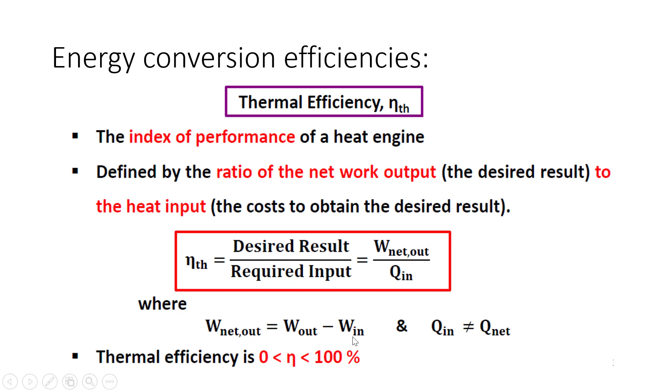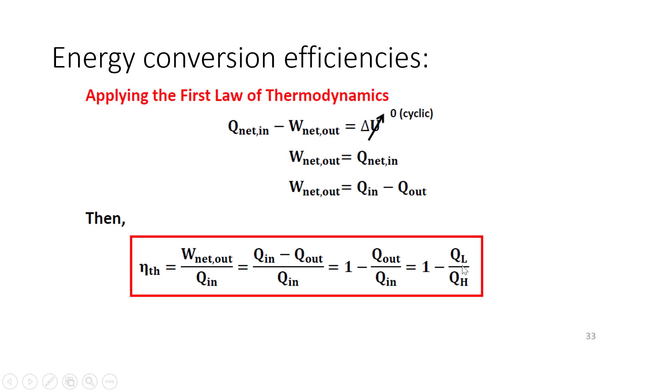Now we're looking at reversible process. The reversible processes are processes which never occur, while the irreversible process is a natural process commonly found in nature. Why do they say reversible processes never occur? Because a reversible process is one in which the system and surrounding can be restored to the initial state from the final state without producing any change in the thermodynamic properties of the universe.

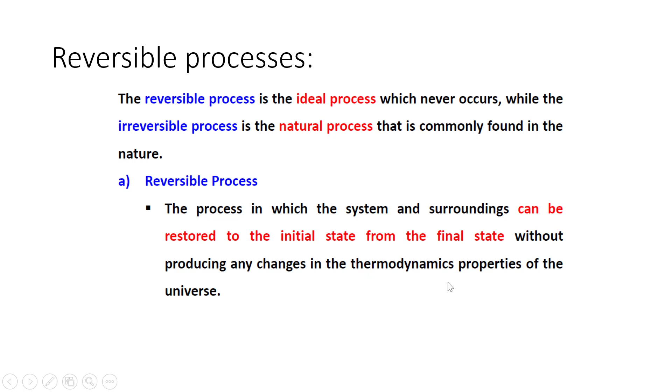If we want to return something logically from the final state to the initial state without changing some thermodynamic properties, there should actually be a change. So reversible process is actually an ideal process.

There are two important conditions for the reversible process to occur. One, the process should occur in infinitesimally small time, meaning it happens in a very short time. Two, all the initial and final states of the system should be in equilibrium with each other, meaning the initial state must equal the final state.

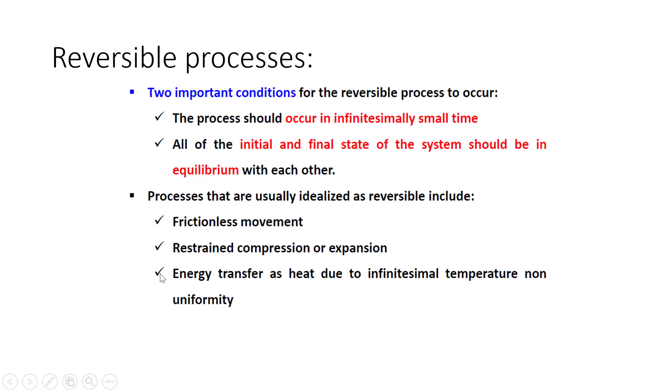Processes that are usually idealized as reversible process include - we must remember we idealize these, they don't really occur that way - frictionless motion, restrained compression or expansion, and energy transfer as heat due to infinitesimal temperature difference, not infinity. There are other examples you can look at too.

Now we will look at irreversible process. The irreversible process states that the initial state of the system and surrounding cannot be restored from the final state. This is logically how it is - the initial state of the system truly cannot be restored, the surrounding cannot be restored from the final state.

During the irreversible process, the various states of the system on the path of change from initial state to final state are not in equilibrium with each other. In simplified terms, the initial state is not the same as, not equal to, the final state.

During the irreversible process, the entropy of the system increases decisively and cannot be reduced back to the initial value. So when an irreversible process occurs, it means entropy is always increasing. Entropy is S. Enthalpy is H. You can look back at that.

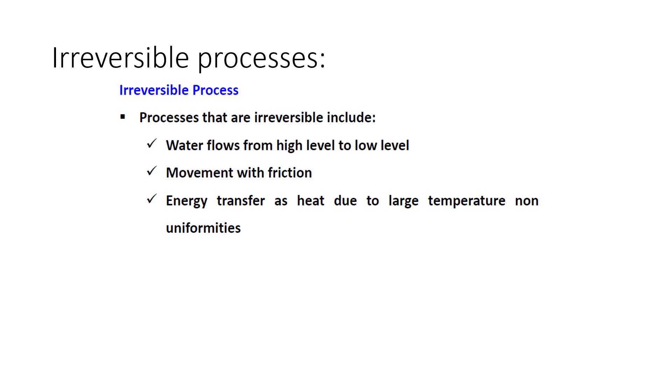Now we'll be looking at the Carnot cycle and principle, and Carnot heat engine. What is the Carnot cycle? The Carnot cycle is a concept of cyclic operation. The Carnot cycle has 4 reversible processes, which are 2 isothermal processes and 2 adiabatic processes. So remember it has 4 processes, but 2 processes are isothermal and another 2 processes are adiabatic.

So what is a process? For example, we have here from point 1 to point 2 - this is one process. From point 2 to point 3, another process. 3 to 4, another process. 4 to 1, another process. Now we have 4 processes. The line indicates the process, so from 4 to 1 we get a line - the line here is a process. This is an example of a Carnot cycle in PV and TS diagram.

If you're drawing a Carnot cycle TS diagram - this is a TS diagram, T versus S, where S stands for entropy. This is not V, this is S. So we also have a bell curve, and then we have two constant pressure lines - P1 constant pressure line and P2 constant pressure line.

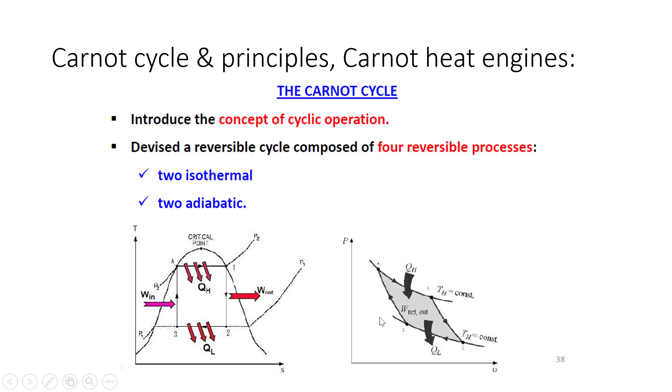Okay, we also have QE, we have QH, and we have QL. Okay, for the PV diagram, we have two constant temperature lines. Okay, kalau TS diagram we have two constant pressure lines. For the PV diagram we have two constant temperature lines. Okay, TH dan juga TL. Okay, ingat macam mana nak draw ni.